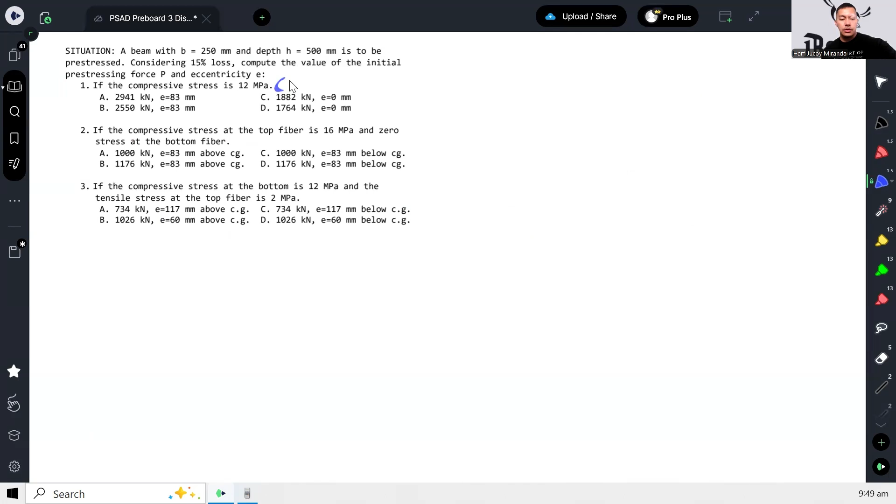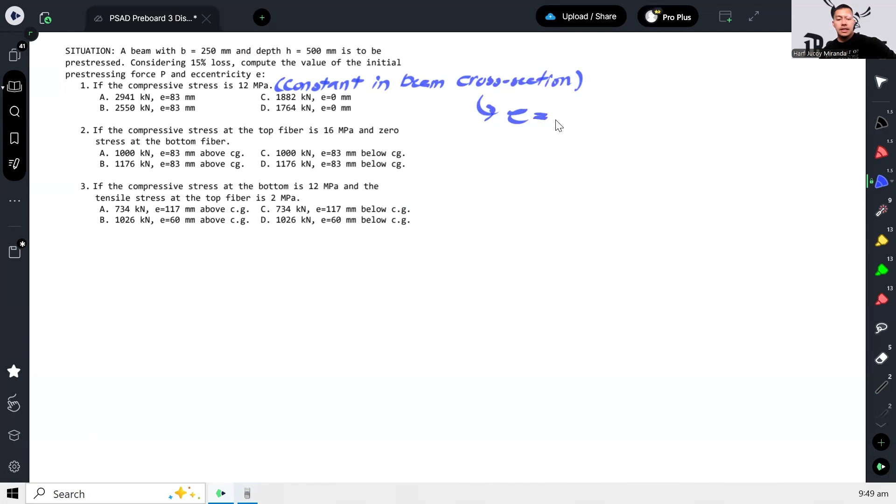At dahil doon, masabi ko na kaagad na eccentricity dito, zero. Kasi ang mangyayari doon sa number one, para maging constant, ito yung beam natin, ito yung neutral axis or center. So dito ilalagay yung pre-stress, kaya diyan ilalagay yung tendon. So yung eccentricity natin ay zero. Pero ano yung value nung pre-stressing force? Tawagin ko to na initial pre-stressing force.

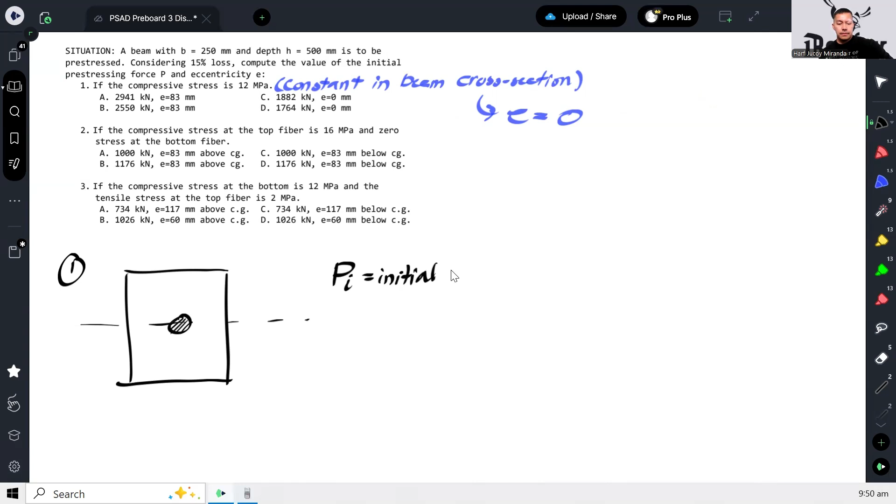Kasi may pinapa-consider na loss. So ito naman yung final, and equal ito sa dahil 15% loss, o di 1 minus 0.15 ng initial, or basically 0.85 ng initial. Yan yung final pre-stressing force.

So to calculate the initial, bali ano lang to, force over area. So bali compressive stress is 12 megapascal is equal to final pre-stressing force over area, which is in this case 12 is equal to 0.85 initial. Gawin natin tong Newton, kung kilonewton yan, over area. So ang area natin is just 250 by 500.

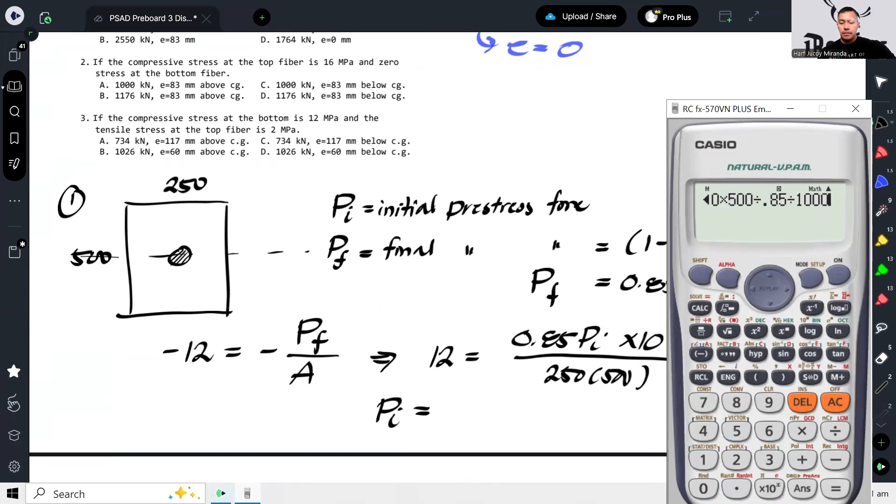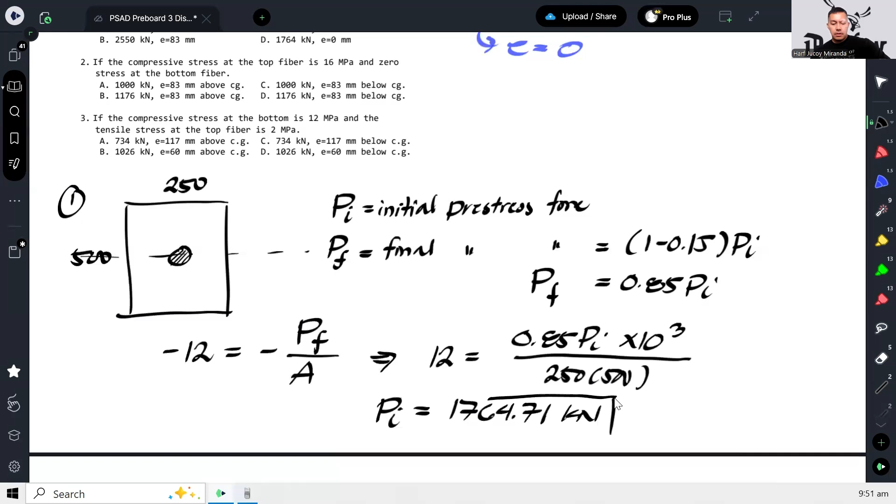Okay, so therefore, the initial pre-stressing force is 1764.71, with an eccentricity of 0. So that would be letter D.

Again, kaya ko kagad nasabi na zero eccentricity kasi hindi naman in-specify kung ano yung compressive stress na to. So we assume na sa buong cross-section. At kapag sa buong cross-section, parehas lang yung stress sa lahat, ibig sabihin, yung pre-stressing force is nasa centroid mismo. So that's why walang eccentricity.

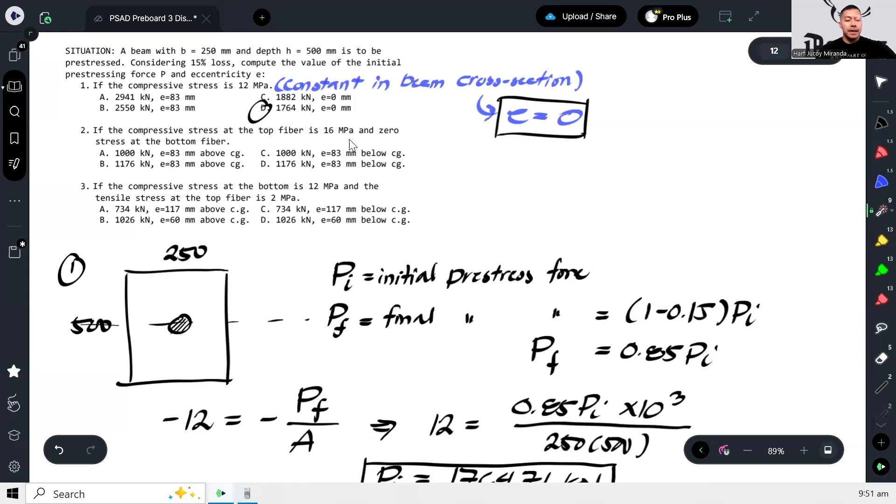So number two, if the compressive stress at the top fiber is 16 megapascals and zero stress at the bottom fiber. Number two.

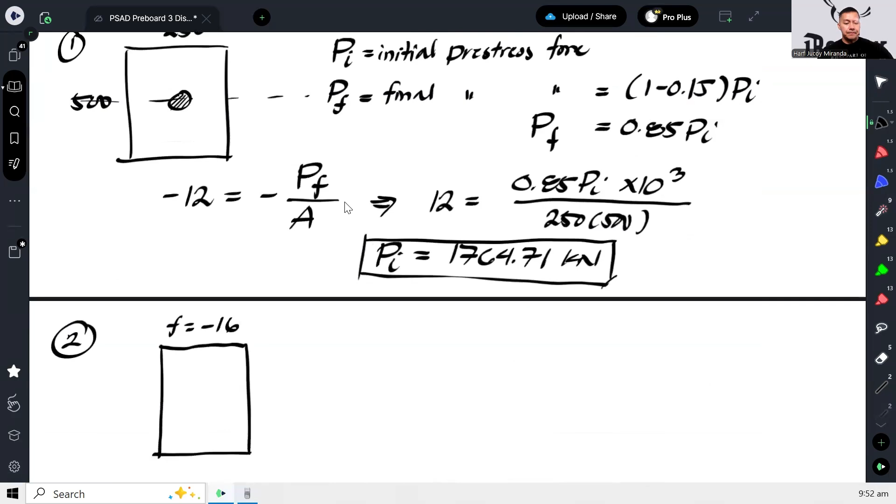Okay, so ito yung cross-section natin. So dito sa taas, ang stress dito, top fiber, compressive, so negative 16. By the way, sa pre-stress, ang sign convention natin is positive yung tension, negative yung compression. Kaya we have to specify na ito negative 16. Tapos sa bottom, ang stress ay 0.

Ayan. So saan ilalagay yung tendon, and at the same time, anong value ng pre-stressing force? So again, ito yung centroid natin. Now, how do I know kung saan ilalagay, sa ibabaw ba or sa ilalim?

Actually, pwede ka mag-assume, tapos mamaya makikita mo na mag-negative yung sagot mo. Pero maganda kasi magkaroon ka na kagad ng initial intuition kung saan mo ilalagay. So pansinin niyo, sa ibabaw naging compression, sa ilalim ay zero. Tapos ang ibig sabihin, mas malaki ang stress dito. So dahil mas malaki ang compressive stress dito, ibig sabihin, dito nilagay sa ibabaw banda yung tendon.

Kasi pag nandiyan yung tendon, ang magiging itsura ng moment, ganito. Diba? So yung nasa ilalim, magiging under tension. Yung nasa ibabaw, under pure compression. Kaya ang nangyari, kaya naging compression ito, tapos ito naman ay zero. Kaya dito, it is safe to assume na nandito yung tendon sa ibabaw.

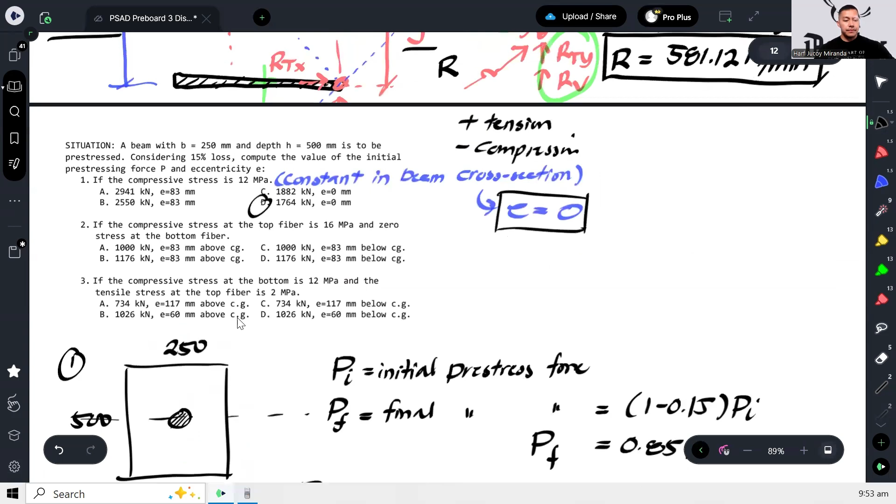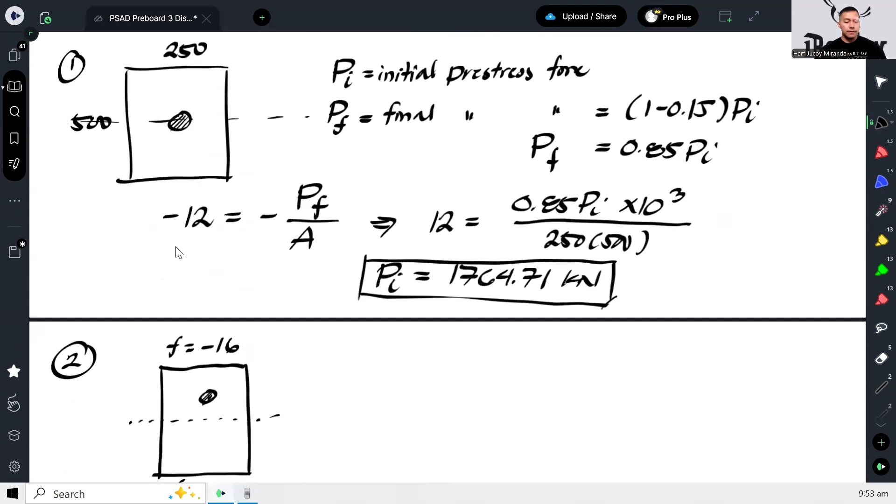Kaya kung titingnan mo yung choices, kung hindi mo na to, wag mo na to pansinin. Above center of gravity lang yung pinagpipilian natin dito. So, how do we solve? So let's call this E.

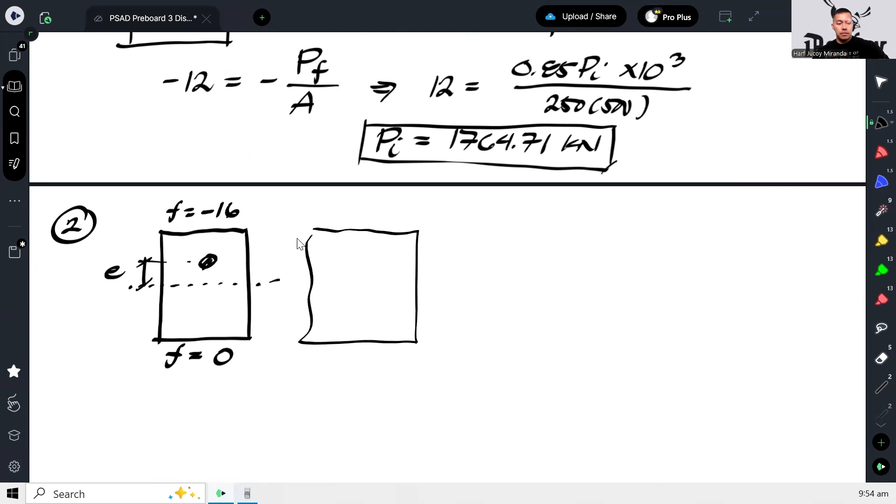Tapos syempre, kapag tumingin tayo sa side view, yung tendon. So yung tendon na yun, mayroong ano yan eh, may compression na ipapasok dun sa beam. So yun yung P final. And at the same time, meron siyang moment na induce kasi dahil eccentric siya. So ibig sabihin, kapag kinonvert ko yan, ito siya. So pag nilipat ko siya sa centroid, meron na siyang moment na kasama.

Okay, tapos yung moment na yun is yung final times eccentricity. Kaya kung mapapansin niyo, etong part na to will be under compression. So nasa ilalim, zero, kasi bakit? Nagkontrahan yung ano eh, ito kasi compression, tapos yung moment, tension. Kaya nagkontrahan tong dalawa, kaya naging zero dito. Kaya alam ko na kagad na sa ibabaw ilalagay yung tendon, hindi sa ilalim, kaya dahil doon sa mga stresses.

Alright, so how do we compute yung mga forces na yon? Bali let's start sa top. Okay, so sa top, under compression yan. So negative 16, yung total stress equals... bago ako mag-start, di ba ang computation natin ng mga stresses, combined axial and bending to? The stresses will be equal to force over area plus or minus MC over I.

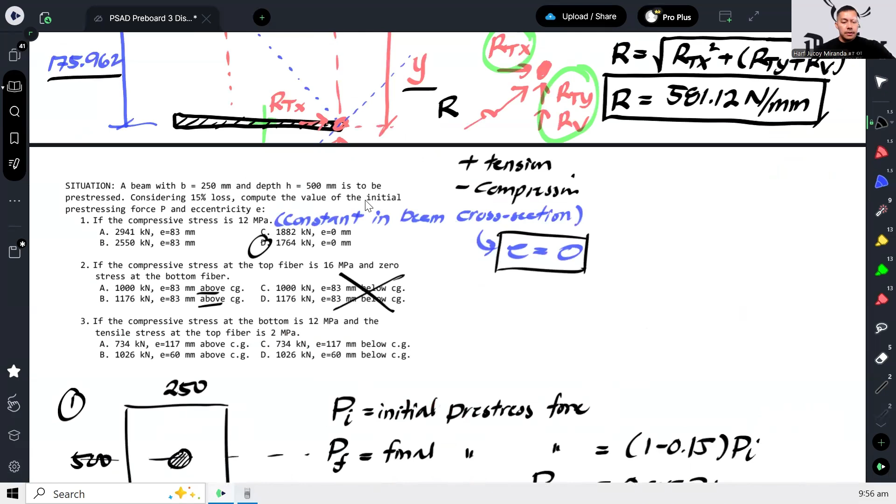Again, positive yung tension, negative yung compression. So we have sa top, negative 16 is equal to compression yan, so negative. Final pre-stressing force, so 0.85 of the initial, kasi ang tinatanong initial. Tapos gawin nating Newton, kung kilonewton yan, over area. So 250 by 500. Tapos sa top, yung moment na effect ay compression din, so negative.

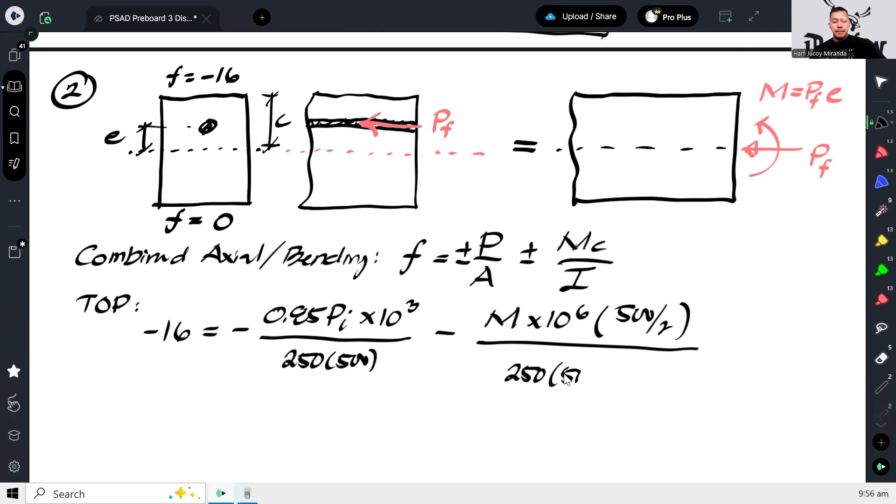So we have moment, gawin natin itong Newton millimeter kasi ina-assume ko na naka-kilonewton meter siya. MC, yung C natin diba? Ito, papunta sa top. Yan yung C natin, which is ano lang, kalahati lang ng 500 over I. So yung I natin ay 250 by 500 cube over 12. Ayan. And that will serve as equation number 1.

Okay, equation number 1. So also, bago ako mag-proceed, dahil ang gusto ko mangyari ay ano siya, final moment kasi to eh. So ang gusto ko mangyari ay ano, initial moment na lang, ma-convert siya sa initial moment. Or should I say, paano ba?

Pwede natin sabihin na yung final moment ay, yung initial is 0.85 times initial pre-stressing force times E, di ba? Pwede kasi nilagyan mo na ito ng 0.85 or pwedeng wag muna, it's really up to you. Kung hindi mo nilagyan ng 0.85, ibig sabihin ang tinutukoy mo dito na moment is yung final moment. Para mamaya, pag meron tayong na-solve, malinaw sa atin kung ano yung mga nakukuha natin na value. So in this case, assume natin na ito ay final moment na, wag muna natin lagyan ng 0.85. Pero kung gusto mo initial moment yan, so maglalagay ka ng 0.85 para ma-convert siya into final. So that's equation 1.

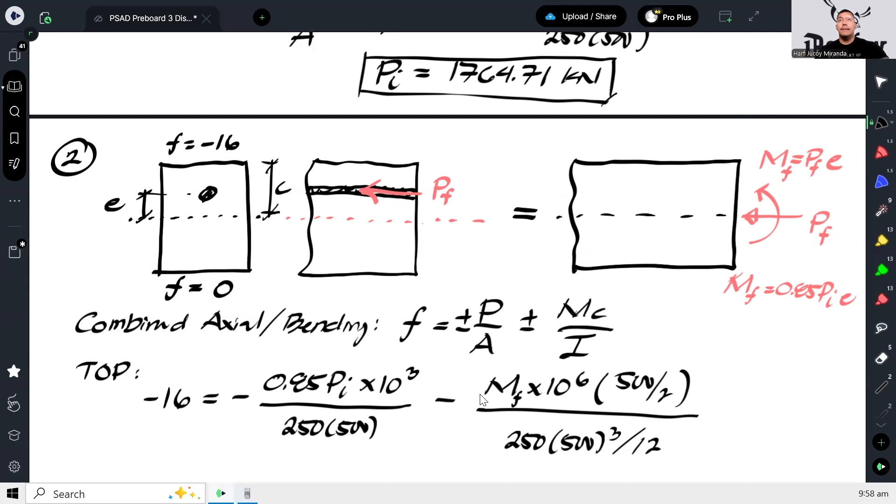Now, para makaproduce ng another equation, punta tayo sa bottom. Sa bottom, zero yung stress, and that is negative 0.85 initial stress times 1,000 over 250 times 500. So kahit nasa bottom guys, nandito, compression pa rin yung effect nito. Buong yan, compression yung effect niya, kaya lang yung moment, tension na yung effect niya dito, kaya positive na to. Okay, so ang C natin, ito naman yung C natin, kasi nasa bottom na yung pinag-uusapan. Pero dahil nga rectangular lang naman to, parehas lang siya na 500 over 2, over I, 250, 500 cube over 12. That will be our second equation.

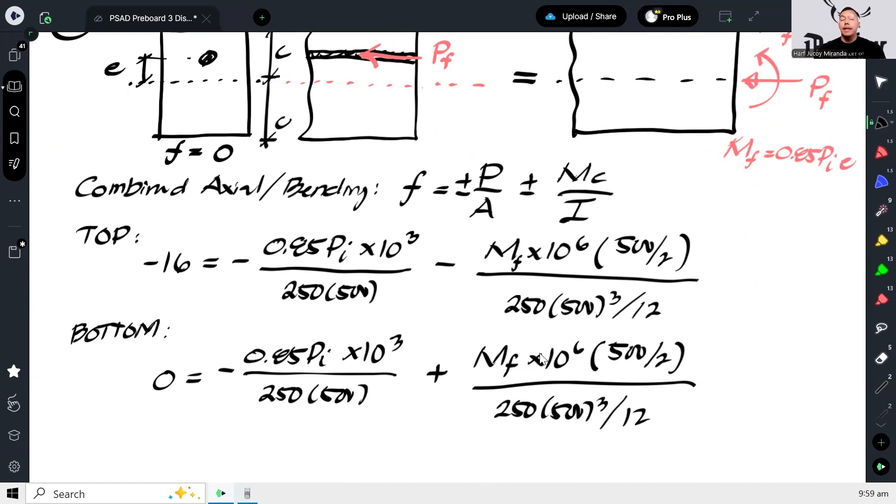And from here, ano lang siya eh, two equations, two unknowns na linear. So we can make use of our calculator to solve for the initial pre-stressing force and the final moment. So para lang umikli dito, type ko. 250 by 500, lagay natin sa A. Tapos yung moment of inertia, lagay natin sa M. Okay na yan.

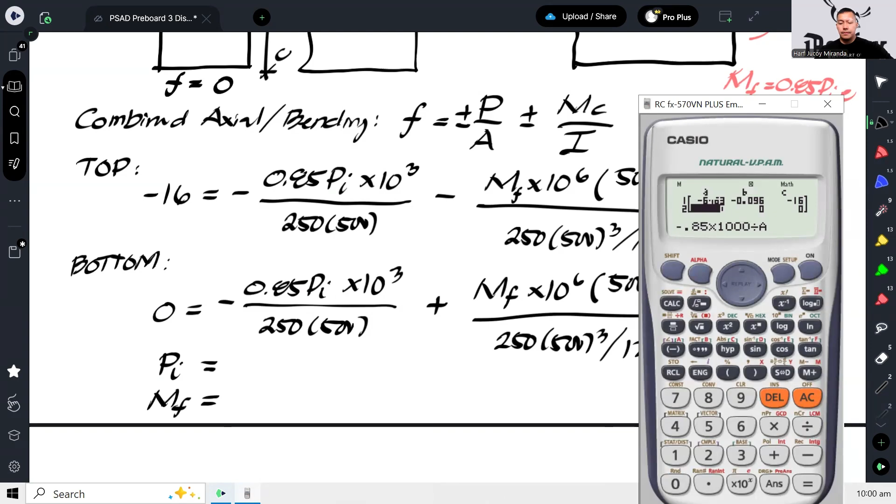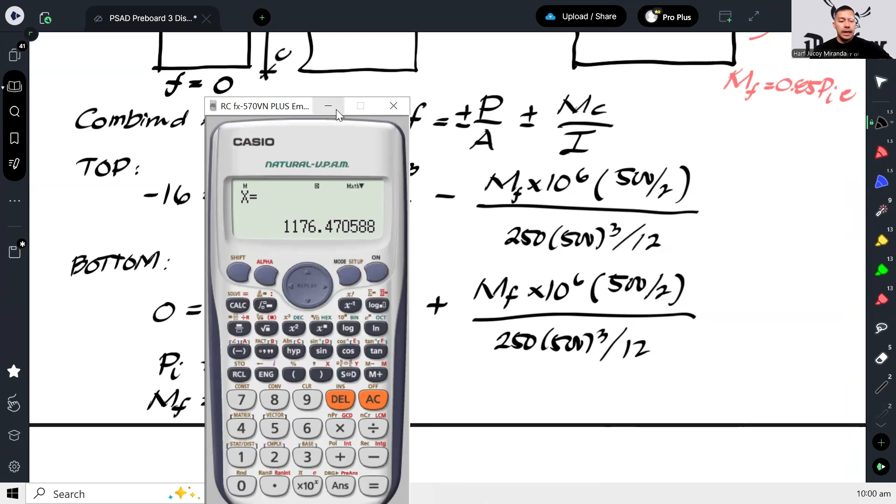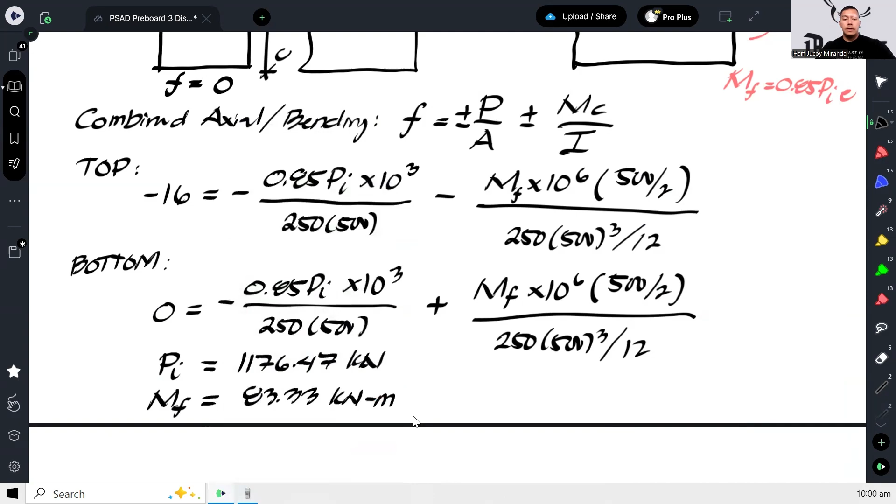Okay, so we have negative 0.85 times 1,000 over area. Tapos negative 1 million times 500 over 2 over moment of inertia. Tapos negative 16. And then we have negative 0.85 times 1,000 over area, and then we have 1 million positive, and then 0. Okay? So this is our PI, 1176.47. And this is our final moment, 83.33 kilonewton meter. Okay? So ngayon, kung titingnan natin, actually ito lang yung possible na sagot.

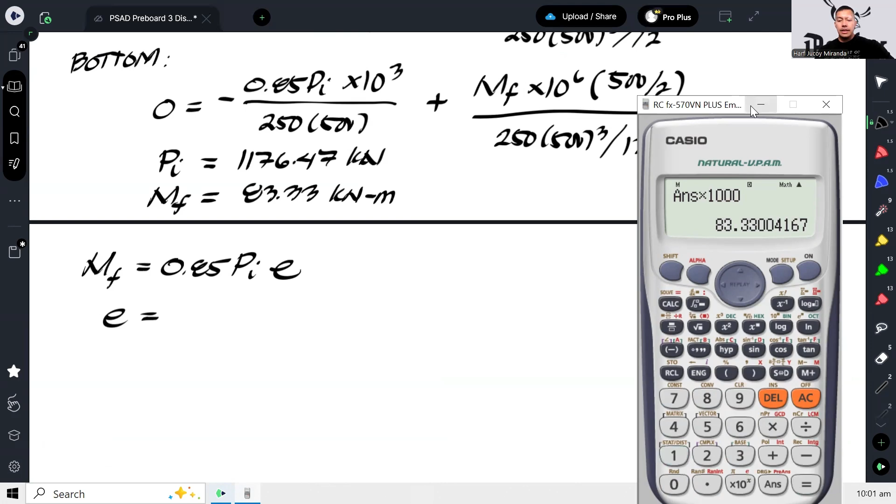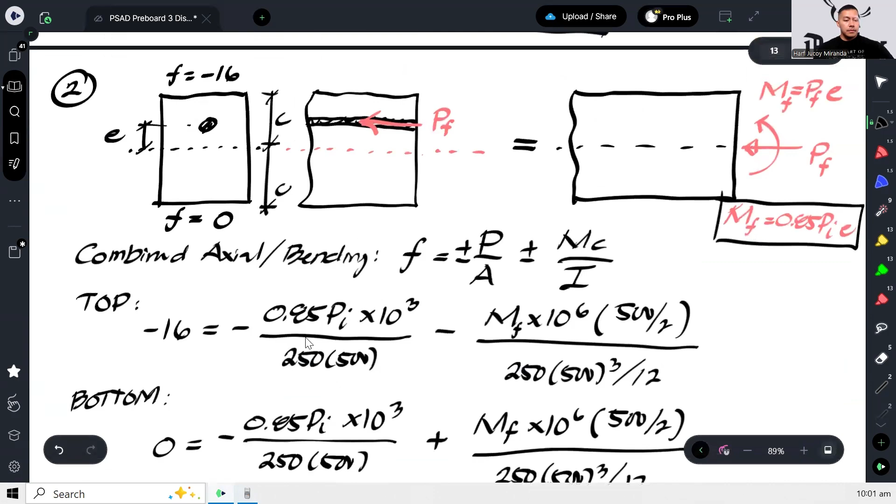Diba? Letter B na kagad yung sagot. Pero paano ba kunin yung eccentricity na value? Madali lang yan, diba alam natin na ito yung relationship ng final moment. Ibig sabihin, yung final moment ay equal sa 0.85 PI times E. So you can solve for E. So that's 83.33 over 0.85 times 1176.47. This is going to be in meter, kasi naka-kilonewton meter to eh. Diba? So divide mo ng 1,000 para maging mm. That gives you, multiply pala ng 1,000. So 83.33. Okay, so that's why this is our answer.

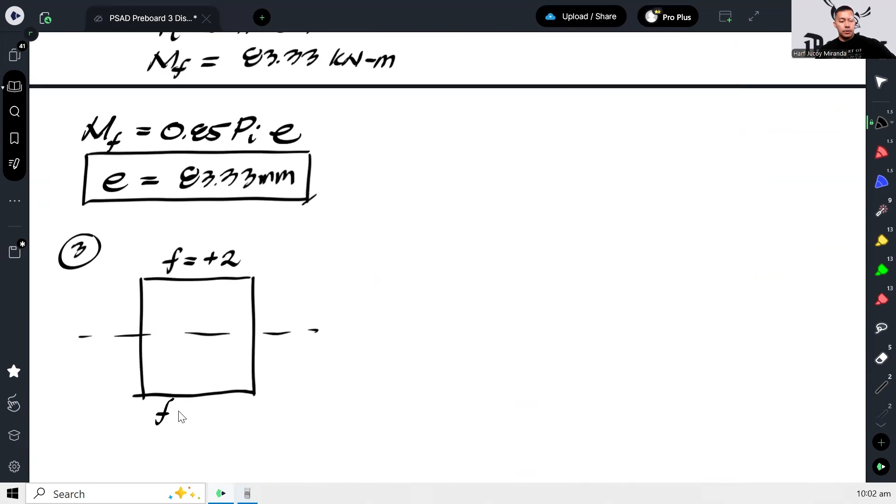Okay, number 3, ito yung cross-section natin. Ito yung centroid. Sa top daw, ang stress, tension na 2 MPa. Tapos sa bottom, compression na 12 MPa. Okay, so dito sa tingin nyo, saan ilalagay yung tendon? This time, sa ilalim naman.

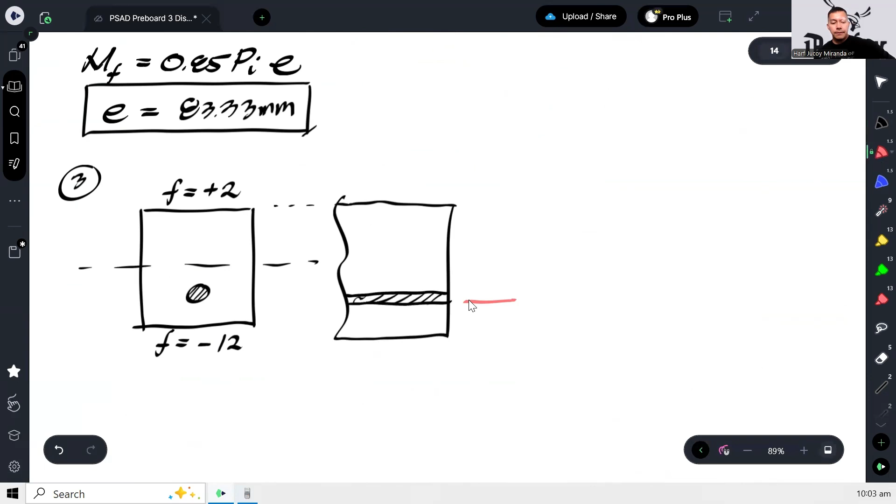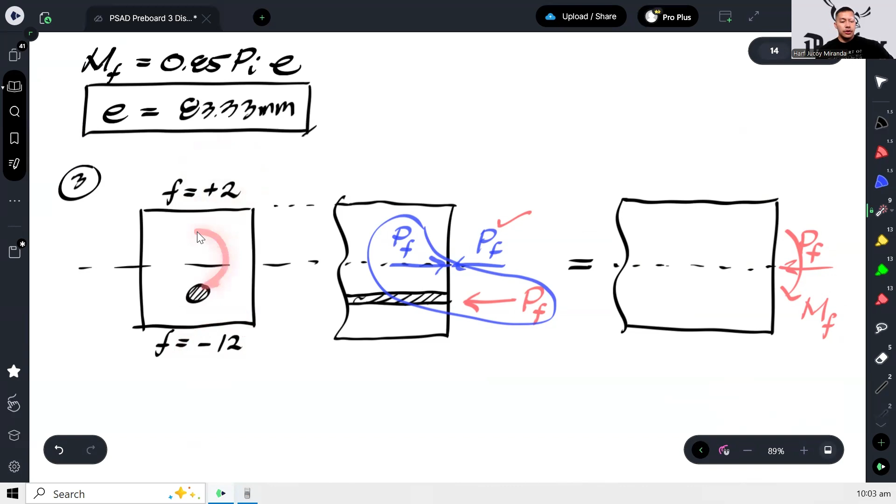Bakit? Kung tingnan mo sa side view yan, kung nandito yung tendon mo, so yung tendon na yan will have a compressive force. Yung compressive force na yan will induce, kasi mangyayari dyan pag nilipat mo yan dito, PF, naglagay ka dito ng PF magkabilaan. So, etong dalawang to will be a couple, they will produce moment na clockwise. Kaya equal lang siya sa, meron kang PF sa centroid na naiwan, ito yon, tapos meron kang moment na ganito. Okay? So kaya nasa ilalim kasi ito compression to eh, kasi ito tension. So, that's why you want your moment na ganito ang itsura.

Okay? So, ganun ulit. Sa top, we have positive 2 equals negative P over A kasi yung PF natin, yung effect niyan, ano pa rin eh, compression pa rin kahit na nasa top ka. So, negative 0.85 PI, gawin natin Newton over area. And then, etong moment na to will produce tension. Okay, so final moment times 10 to the 6, C, yung C natin, ito, which is 250 over I. That's your equation 1. Equation 2 sa bottom naman.

Sa bottom, we have negative 12 equals negative 0.85 PI. Okay? And then sa bottom, yung effect ng moment, compression na. Ang C natin, ito naman, ito dapat, which is same lang kasi, no? Pero pag iba yung shape ha, mag-iiba yung distance ng ibabaw sa ilalim, kaya you have to be aware of that. Nasa bottom na tayo, kaya yung C natin, ito na. Kanina, nasa top tayo, so ang C natin, ito. Okay? Pero nagkataon lang ngayon na parehas. Okay, over I.

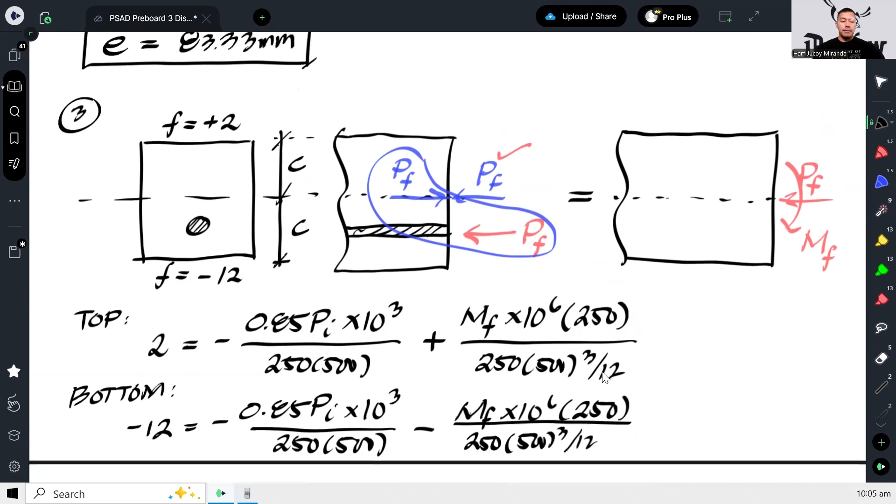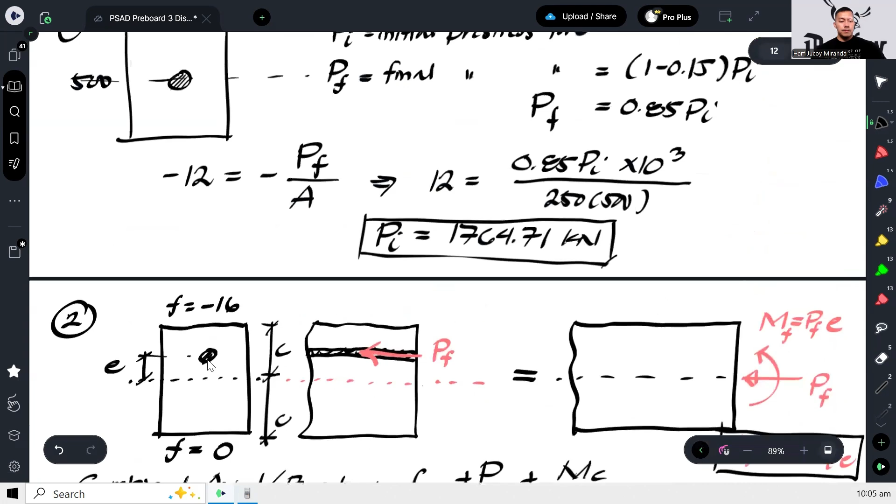And then again, two equations, two unknowns, we should be able to calculate for PI. And then going back here, dahil ang ina-assume, ang ina-expect nga natin dito na location ng tendons ay nasa bottom, edi wala na to. Dito na tayo titingin, no? So, kung alin man dyan lumabas na P, yun yung sagot natin. So, tingnan natin.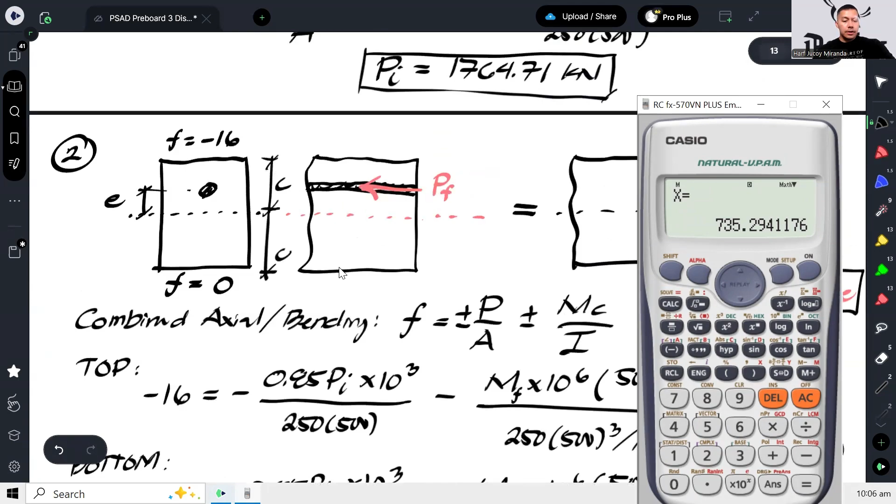Positive 2, and then negative 12. So, importante yung sign dito, guys. Pag nagkamali ka ng sign dyan, kakamali. So, 735, ito na kagad yung sagot, Letter C. Okay? And then yung M ay 72.92.

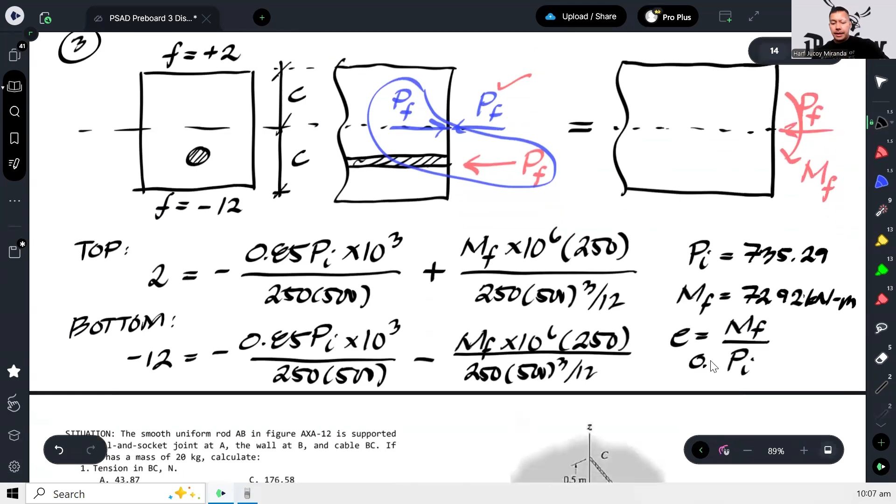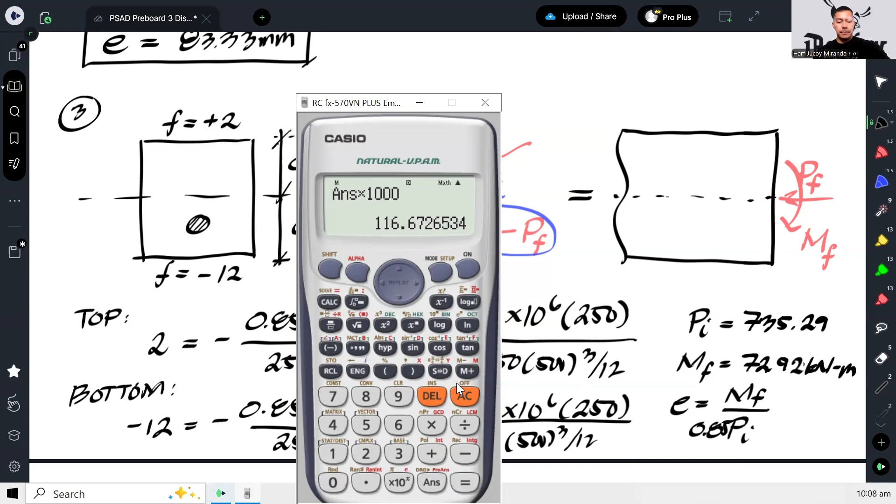Okay? And once again, if you want to calculate yung eccentricity, MF over PI lang, or sorry, 0.85 PI. So, pakita ko lang mabilisan: 72.92 over 0.85 of PI, so lalabas yung 0.117, so times 1,000 para maging mm. So, 117, ito, tama to, 117. Okay? So, that's how we solve this problem.